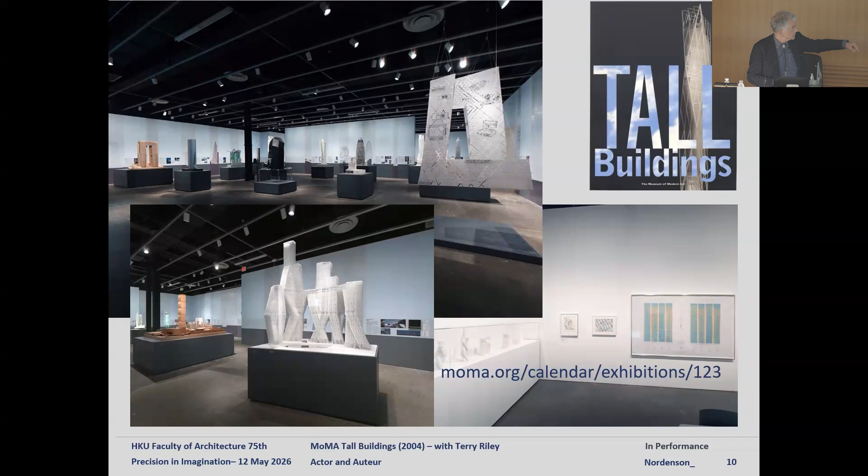These are some of the buildings that were shown in the exhibition. A big part of the exhibition that I felt was very important was to show the buildings in section. If you think about the CCTV tower, part of the magic of that idea and its inevitable evolution was the ambition of what it was going to do in section, not only as a beautiful sculptural object in space, but also as an inventive spatial idea about circulation and section. Obviously not all of that played out as the architect had wished, but it was an ambition worthy of being represented as we did here.

So I want to talk a little bit about the World Trade Center. This is a photograph taken shortly after the building was completed by the engineer Leslie Robertson.

Robertson worked with Yamasaki on this building and did something very inventive that nobody knew about until we made a drawing that I'm about to show you. You may be familiar with this structure. It was quite an abstract work of architecture, because each of the vertical members and each of the horizontal members that make up this cage—a kind of stiff tube that resists the wind loads—has the same outer dimension from top to bottom.

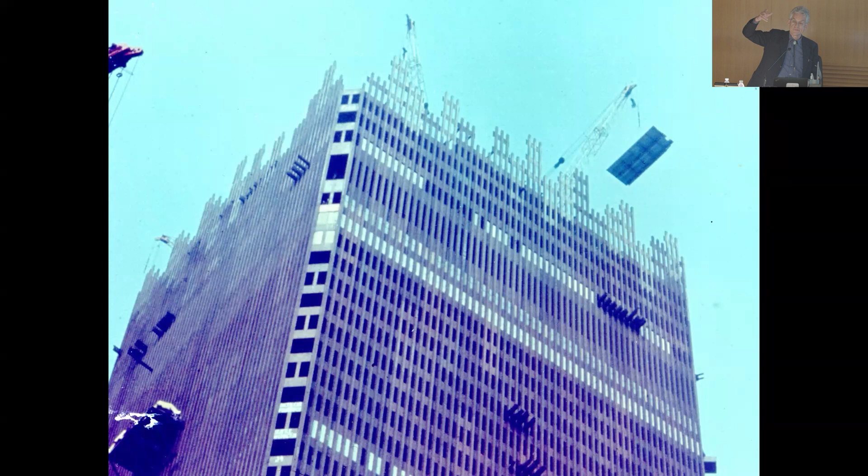So there's no recognition of the fact that this is a heavy building coming down to the ground, resisting wind that is quite strong, and would normally be thought of as something that would get thicker at the base. Instead, it's all the same throughout, top to bottom. So there's this very specific decision to create this kind of abstraction of a building that also has a specific role in resisting the wind loads.

Given that, and I don't know whether the idea that all the members would be the same came from Yamasaki or Les Robertson, but given that was a premise they may have invented together, what Robertson did was manipulate the kind of steel that each part of the building would be made from. He picked 14 different types of steel, ranging in strength from very strong to normal, and located them, as you see here, color-coded—red for high-strength steel, blue for lower strength steel—distributed in a way, these are unfolded elevations, that achieved the goals he had for the behavior of the structure.

What he was trying to do was overcome an effect you get in these kinds of box sections, where the forces try to stay near the corners. The purpose of a box section like this is to make a complete section where the front and back contribute to the stiffness of the building as flanges. But the problem is that the forces going into the flange from the sides don't always get into the middle of each of the faces of the front and back.

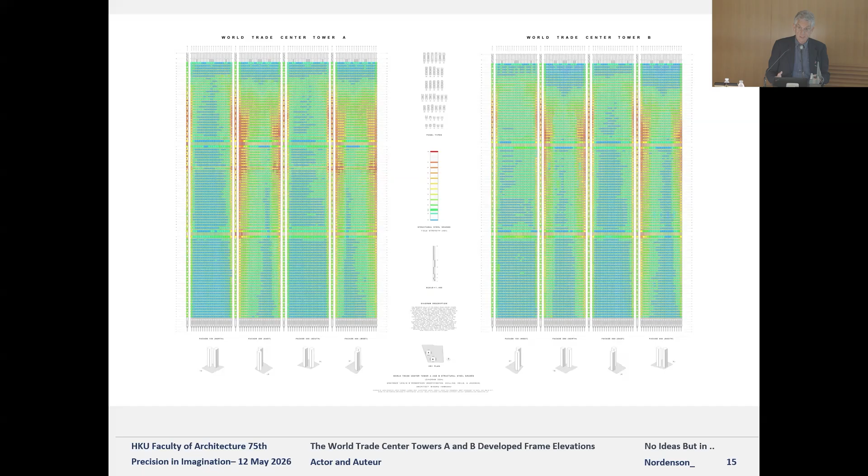Now, he was responding to what? He was responding to the variation in wind load coming off the water side or coming off the city side. He was responding to the fact that you had two towers that shielded each other from the wind. So what you're getting here is his choice, but also a representation of the results in the wind tunnel of the effect of this particular environment, with a particular distribution of wind forces at different times of the year and the relationship of the towers to the city.

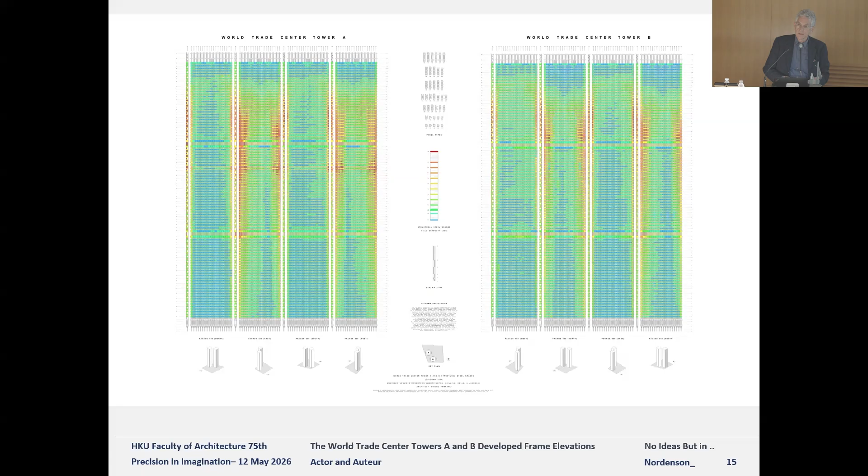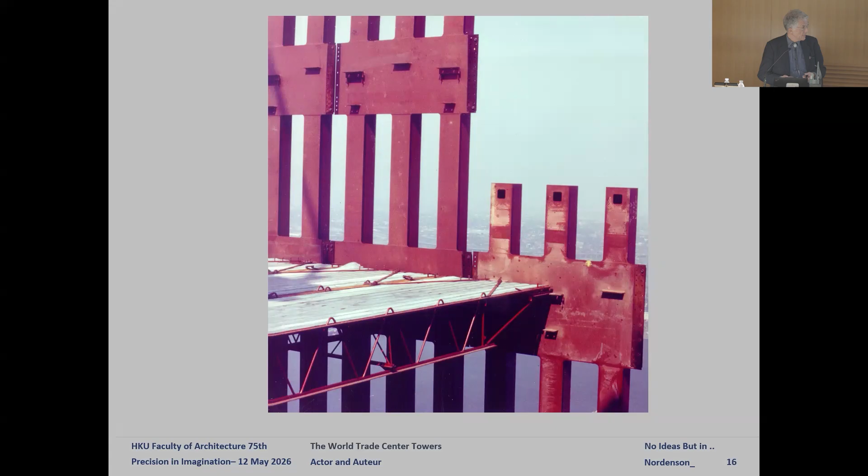So we drew this all out in this drawing, which was exhibited in that MoMA show, as a manifestation of this amazing creative act that had never really been understood or seen before. Here was somebody making something extraordinarily special that no one could see. Here you can see how these members are all the same—it was all prefabricated, everything really made from scratch. They were trying to channel the idea of the Apollo program into architecture, trying to make something with the same kind of ambition and technical prowess, the lightest possible building they could make.

So that's one model where there's a creative act that actually erases itself. Another kind of model is the Statue of Liberty, where you have three very separate authors operating in parallel. You have Eiffel, who did the structure inside that you see there all the way on the right, and you have Bartholdi, who designed the sculpture you see on the left. This is when it was being mocked up in Paris before it was disassembled and shipped over—everything was prefabricated in Paris in these shops. The skin is thin copper that was pushed into its shape on wooden molds installed in the shop—very complex, beautiful folds in that skin.

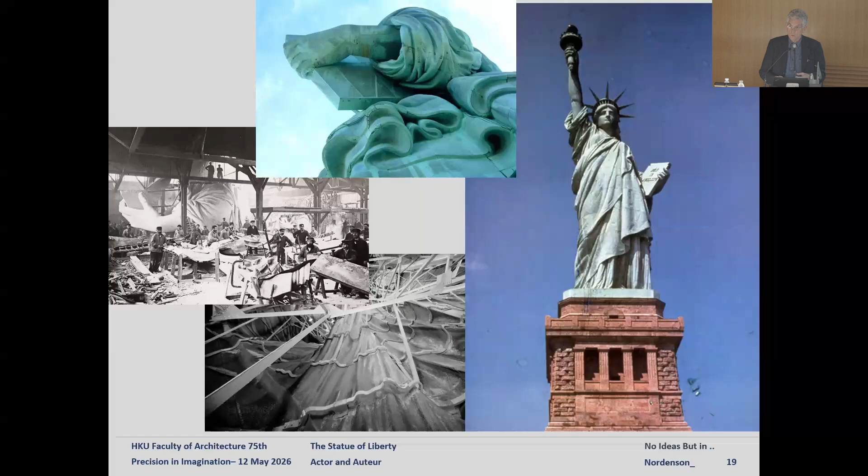The structure inside, sorry, the structure inside you see there on the right is a kind of pillar, like a core of a building with arms sticking out that then hold the sheets of that skin like leaves on a tree. So the sheets are independent from one another, floating relative to each other, held by these branches of this kind of tree-like structure. Here again, a very different effect on the outside than what you learn as you get to know what's happening on the inside as well.

One way for me to think about structure in its role in society, maybe responding to Shigeru Ban and Ito, is to ask what do they mean when they say structure? They don't necessarily mean something instrumental. It's not just the structure that is there to hold up whatever form they come up with.

It's something different. And I think one way to understand how it's something different is to think about what happens when you're faced with a ruin. So after 9/11, I helped organize a group of structural engineers that went out about 3 days after. 9/11 was on a Tuesday. We were on site working on Friday, helping the contractors move things around safely, basically keeping an eye on what they were doing. Everybody was very traumatized. Everybody was working really hard. It was a situation where people could easily make mistakes and get hurt.

So we organized into groups, and then I also organized teams to go out into the neighborhood and map the damage on all the buildings, about 400 buildings in the neighborhood that had been evacuated, so that people could come back and live in the buildings that were safe. We used some techniques that had been developed for post-earthquake damage evaluation for that.

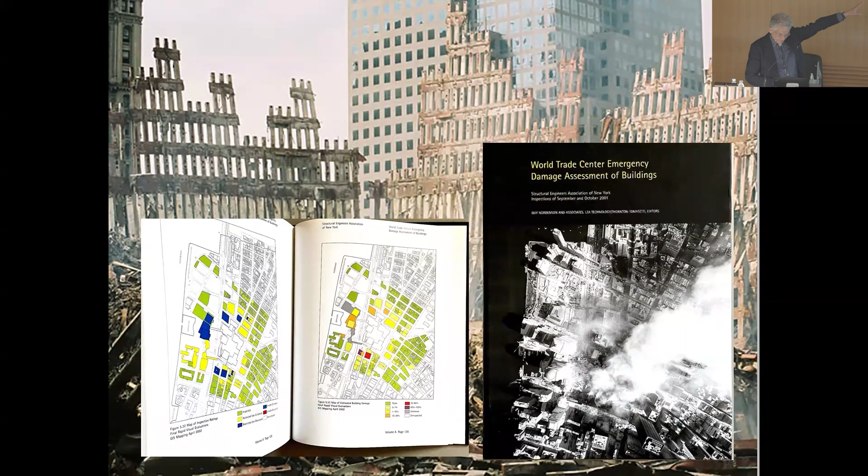But one of the things that was immediately discussed is, what do you do with all this? Unfortunately, the American impulse in a situation like this is to wipe everything off and hide it somewhere. What could have been the case is that we might have kept what remained, and used that as the monument. That's the structure. And the structure was something that played a significant role.

People are focused on the fact that the buildings collapsed, but it's true that the buildings also stood up for quite a long time, for almost an hour before they collapsed, which meant that people who were below the fire could get out, but the people above the fire could not get out and died. That's actually one of the reasons why Rem came up with the idea of the loop, was a reaction to the lesson that he and everybody else learned about 9/11. This could have been the thing that we were looking at in the future as the monument.

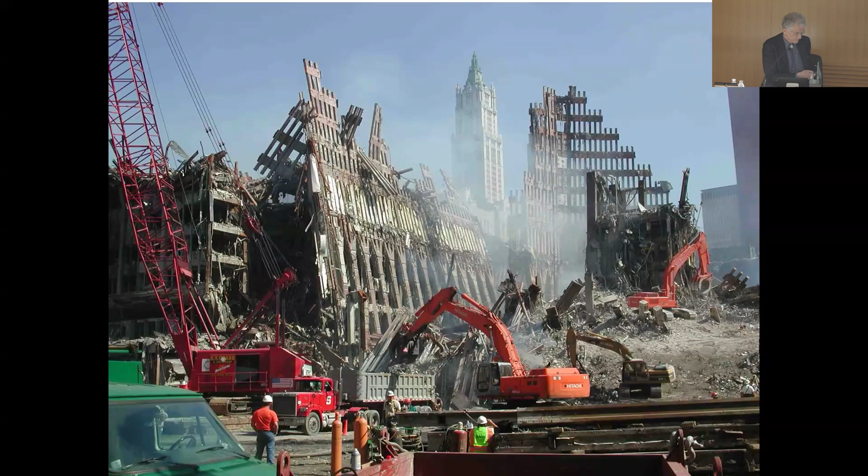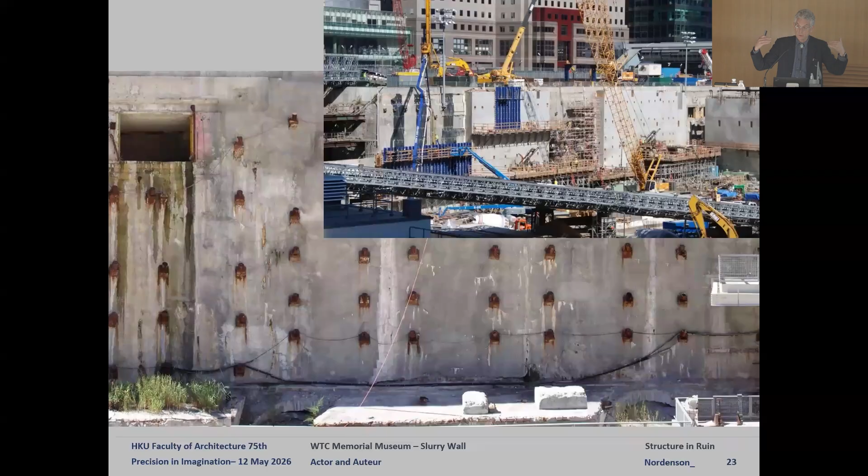And the reason I show this slide is I worked on this, the portion of the old slurry wall that became a kind of symbol for people. I think Danny Libeskind was in particular quite attached to this slurry wall. So I was given the job of figuring out a way to hold the slurry wall without putting any structure in front of it so you could actually see the thing. This image is showing you that portion, as you see there in the middle, of the old slurry wall that's being held from behind, and is now part of the museum there.

So that's a ruin. That was part of the structure that had some sort of meaning for people as a symbol of resilience, as a structure, which before that time didn't really have anything more than an instrumental role in the building. So things get transformed in that way. Think of the Parthenon, right? It's a ruin, but we're attached to it as it is. We don't want to go back in there and paint it back with the colors that it had before. We don't want to go back and add a roof and do everything else.

There is some restoration going on, but we see this as a ruin, and it is a structure. It's a peculiar structure because it's made to work like a wooden structure, but it's an extraordinary influence, at least on Western architecture. There are other examples here in Berlin, the church that was bombed during World War II and was kept, and they built a new church around it. So how we react to tragedy, what's our relationship to ruins that are the manifestation of those tragedies, is a relationship to structure, if you like.

So I think to some extent that may inform what Shigeru Ban and Toyo Ito are saying. There's something for them about the structure that has a deep cultural significance, and I think it's represented by these situations.

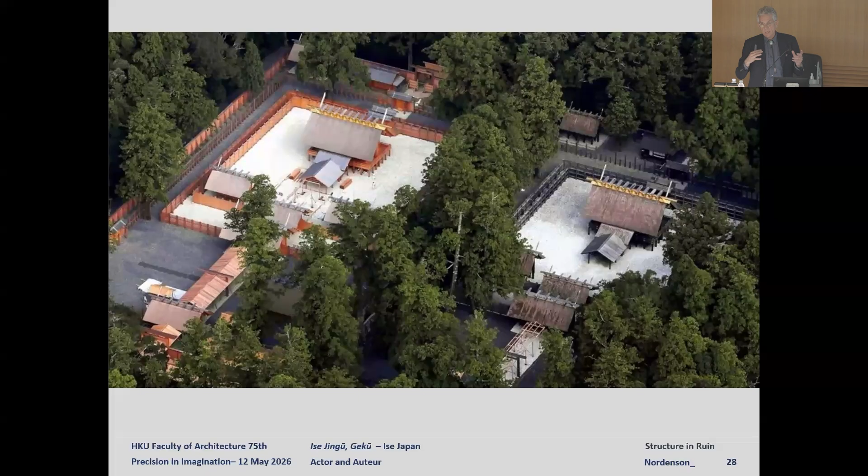There are carpenters, metal workers, all the people that do the thatch -- I'll come back to thatch in a little bit -- trained through multiple generations of rebuilding, so you start out at 10, 12, or 15 years old, and you may end up as the master at age 95. That's a different kind of relationship to structure, to monumentality, to craft, all of which I think play into the reaction you were describing from these folks.

Here you see the old and the new. There are lots of reasons why it's rebuilt, relating to the deity, and lots of not-so-nice reasons why it was such a significant part of Japanese culture, because it represents the fact that the emperor was a deity. It's a complex thing, like any other work of architecture, but it's worth understanding and studying.

So that's -- oh, I keep doing this. Sorry about that, I'll lean on this.

So that's one way to think about structure and the way it plays a role in our culture. And that comes back to this question of what are these forms of collaboration represented in these kinds of situations that we can study and learn from.

With film, you may be aware that in the 1950s a group of French directors developed auteur theory based on people like Hitchcock or Howard Hawks, American filmmakers they saw as having a particular style repeated throughout their films. You go to Hitchcock movies, they're all different, but they're also all the same -- they have a consistency that gives them the impact they have on you.

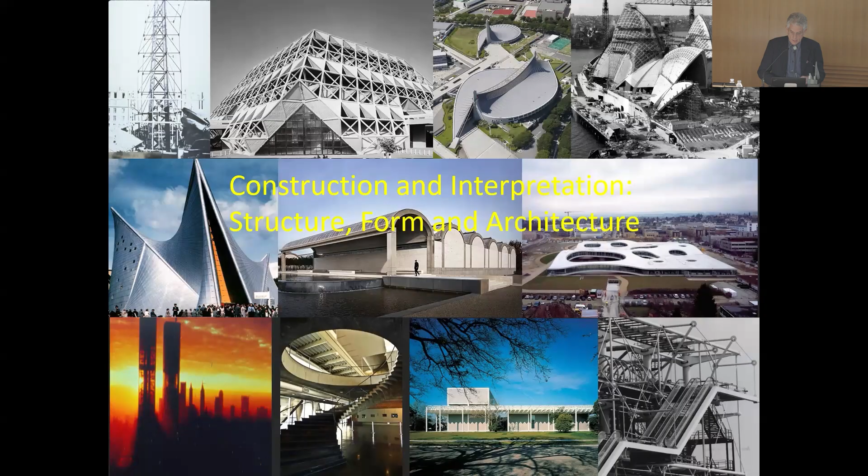So back to architecture. I teach this course, and my ambition is to turn it into a book called Construction and Interpretation, which tries to look at examples of notable works of architecture where there is a complex interaction between the actors participating in it.

Usually you can tell who the author is—the architect, like the film director who is in charge and making the key decisions. But sometimes it's more complicated than that, and sometimes that complication makes it a more interesting work of architecture.

This is the Philips Pavilion of Le Corbusier, which he worked on with Iannis Xenakis, who was an architect who eventually turned into a composer. Corb's idea was that this pavilion was like a stomach—you would go in one end, digest the experience, and come out the other end. So that was his diagram of l'estomac.

What Xenakis was charged with doing was turning that into a three-dimensional form based on these sketches done by Corb. Corb was very busy with Chandigarh, so he wasn't there a lot, and Xenakis ended up in charge of this process.

Building this thing was complicated because it wasn't really a shell. So they had to come up with a system of prefabricated panels that they erected—concrete panels cast on sand, something that Sanaa, that Nishizawa did recently with Sasaki as well. Cast on sand to make the panels that make up this thing.

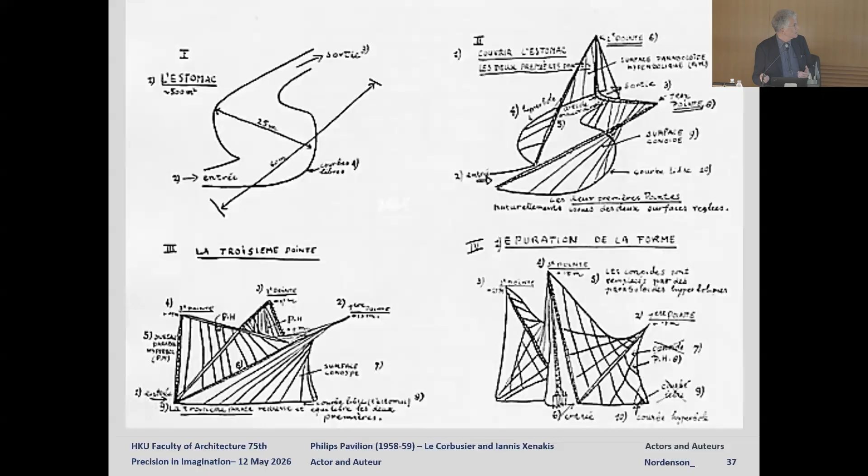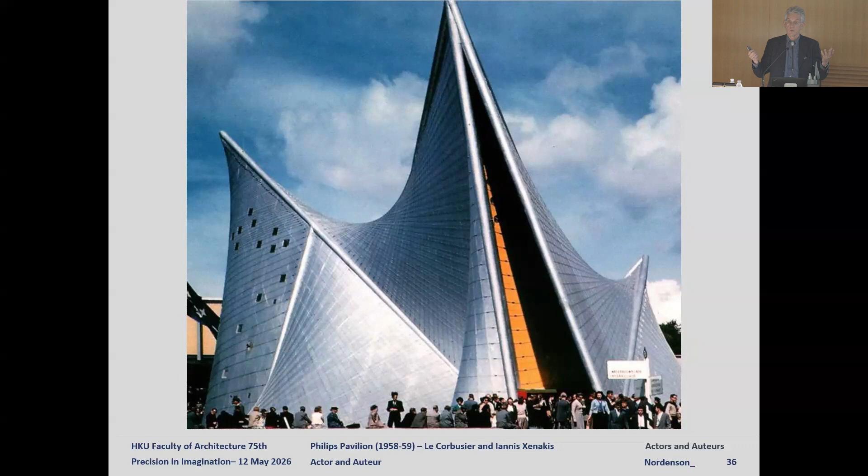If you want to study it, there's a wonderful book by Marc Treib that goes into detail. You can also find videos online of what was happening inside—it was a full experience, movies, music, etc. It was a complete happening inside.

Another example is the collaboration between Pier Luigi Nervi and Marcel Breuer on UNESCO. The team of architects was established by a larger group who were put in charge by the UN of deciding how to make this campus plan and the buildings inside it. Here you see some of them: Corb, Gropius, Markelius, Ernesto Rogers, Saarinen, Niemeyer—some of the same people involved in the UN in New York, both there and at UNESCO.

I think their major goal was to keep the job from going to Corb. Corb, of course, wanted to do it all, and their role, particularly Gropius's role, was to try to maintain this as more of a group project.

What you see when you cut a section through the building is this very characteristic structure by Nervi. A little bit like with the Statue of Liberty, you have a structure of great elegance and sophistication inserted inside the building, the plan of which was decided and developed by the group that you see in this picture.

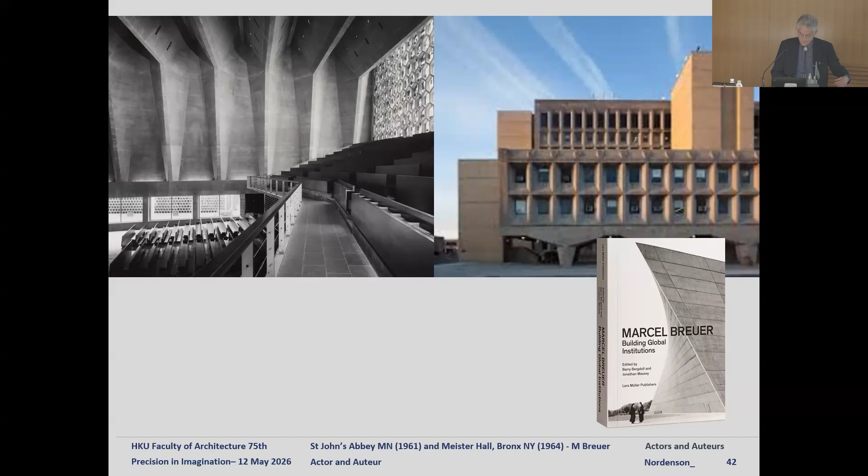There's a wonderful book that Barry Bergdoll put together of essays about Breuer's career. And I have an essay in there trying to argue and explain about the structure.

There are other buildings that have the same sort of characteristics, but also actually have an even more significant role as symbols of a nation. This was the Hall of Nations, built shortly after India got its independence. Indira Gandhi commissioned it, and it was done by Raj Rewal and the great Indian engineer Mahendra Raj, who had worked on Chandigarh with Corb. It was since destroyed.

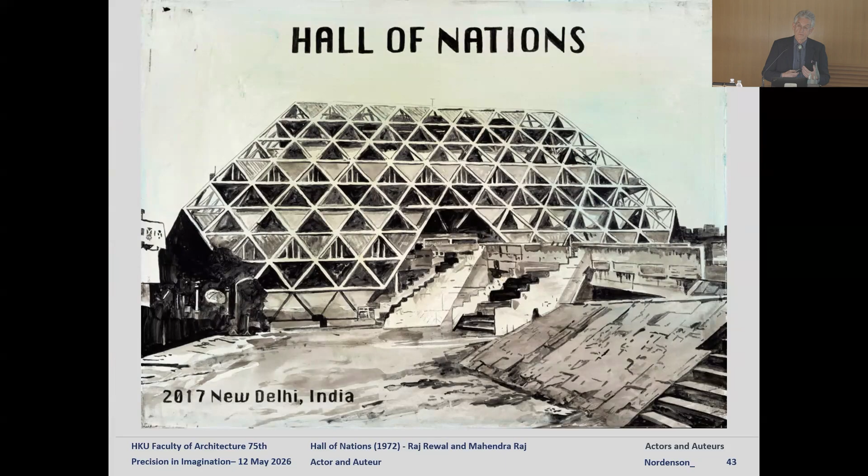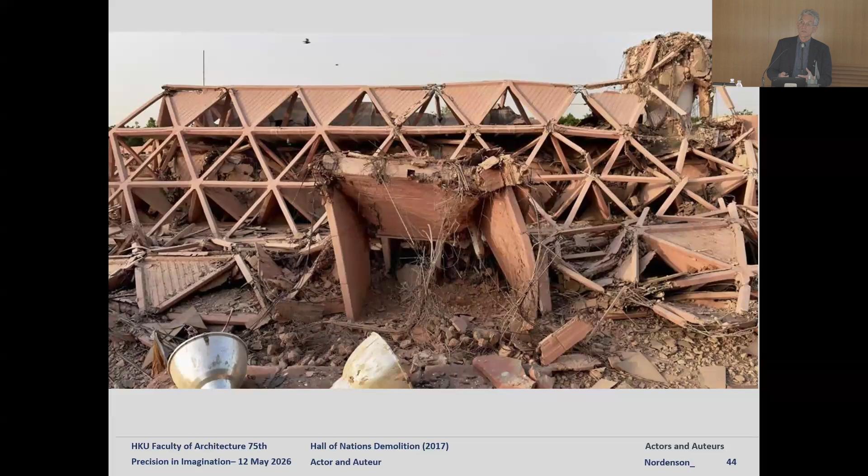Sometimes a structure—and this is a very unusual one because it's a big space frame made out of concrete, which is not the normal thing—that in itself was an effort at producing a sense of modernity, a sense of the rise of a new nation. Which is, of course, why in the current regime it was unceremoniously destroyed because of what it represented. So sometimes these structures have an important and significant role as national symbols.

These here, the Olympic roof in Munich for the 1972 Olympics—again, a complex situation between a lot of different actors. Frei Otto, of course, but the architects actually stole his ideas and won the competition, and then the government said, no, you have to work with Otto because it's his ideas that you're using. Great engineers were involved, Jörg Schlaich, Heinz Isler. A combination again of different actors coming together and producing, I think in the end, a remarkable structure that at the time was meant, and I think did represent, the notion of a light democratic spirit that Germany was trying to present to the world, even in 1972, not long after World War II.

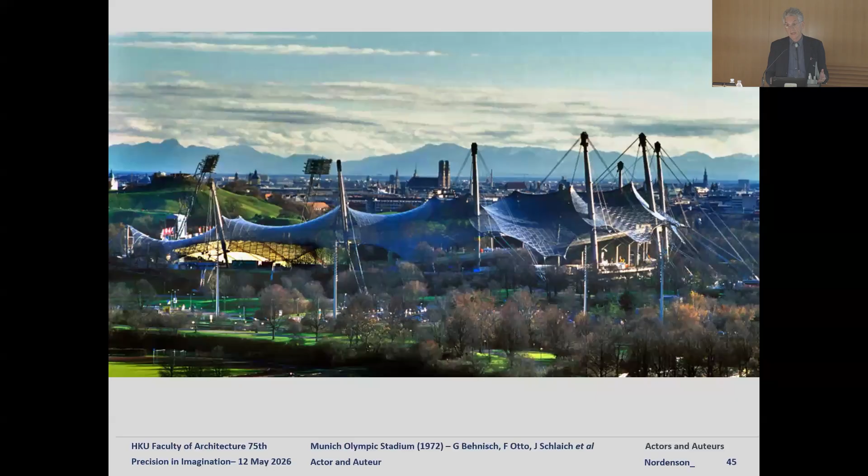So structure plays a role.

Here again with the Sydney Opera House, a very complicated relationship between Ove Arup and Jorn Utzon. I've spent a lot of time in the archive thinking and reading about their relationship. There's lots of confusion about where different ideas came from. But in the end, Utzon quit, but essentially was fired, and then the team had to execute his project after he left. If you study the project and you visit, I think it's a marvel of how well they had internalized the spirit and the concept—the glass walls, the interiors—all of these featured a very true representation of an idea after the author had left the building.

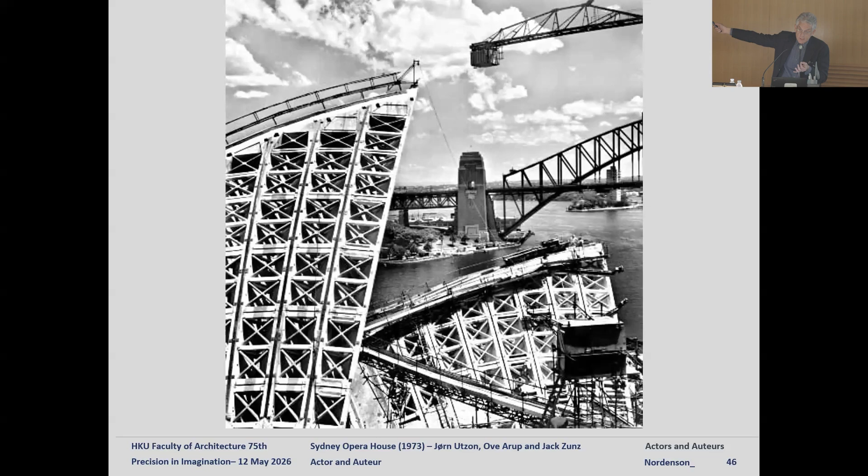So these are great examples, I think, of how great works come about through these kinds of interactions, which in some ways are similar to what you read about and hear about in film, Orson Welles and other examples.

This is the Mannheim Garden Festival Hall outside of Mannheim in Germany, another Frei Otto project, but with a completely different team, Ted Happold and others, Ove Arup, etc. Beautiful, very rational structure as well. And I'll show you a picture in a minute of how it was built.

I think it's really useful and important to study these kinds of projects because they obviously, whether you like them from an architectural point of view or not, they have a cultural impact. And they have an impact because of their culture, because of the way they come about.

And so their histories are really useful as a lesson for all of us in how we can work together to get certain things done.

So I have 7 sections, we're on number 5. This is a really good one. John Cage was a great musician and composer, whereas Cunningham was a choreographer and a dancer. They were also partners in life and worked together a lot. But again, like with the Statue of Liberty, like with Nervi and Breuer, they did their own thing and somehow it came together. In Cunningham's case, channeling the spirit of Marcel Duchamp, he saw that separate track colliding as the thing that made for the magic of the performances they did together.

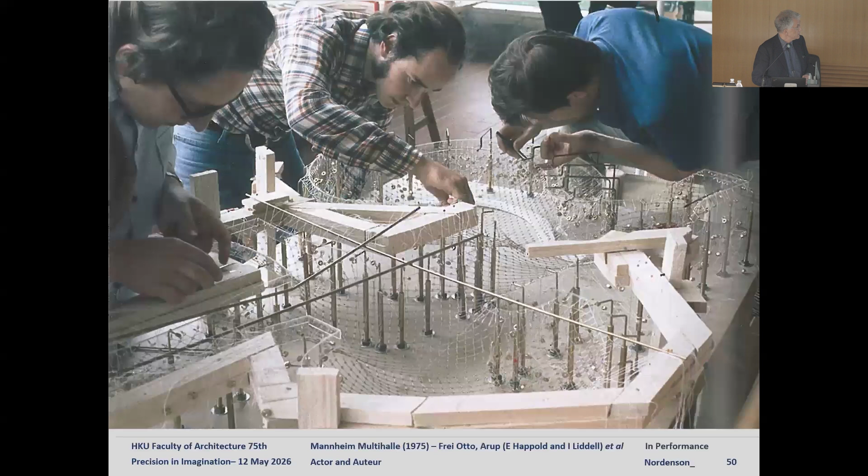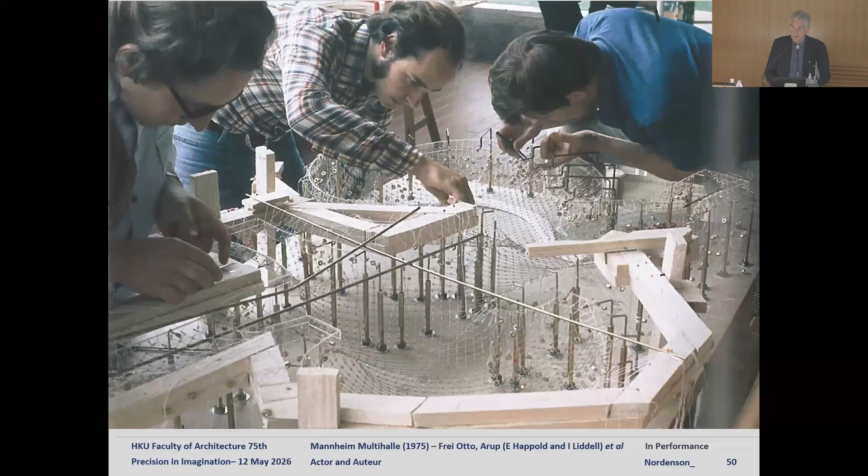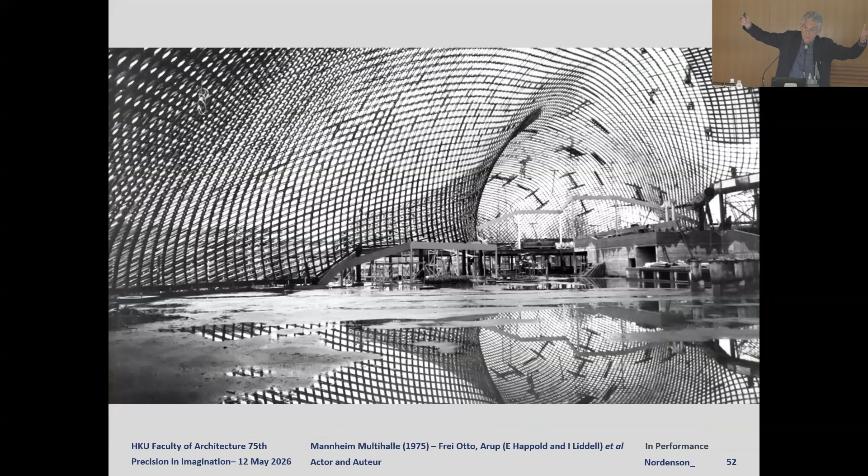The production of buildings like this in Mannheim, the models that people make in the process, is a kind of performance. We look back on the photographs and we're delighted by the energy we see in these efforts. The construction, this is Mannheim again, made out of thin strips of wood, the way the whole thing was laid out flat and then lifted up like a tent and stood there, even though it's so thin, because of the shell action going on, so creatively produced by the team that brought it all together. This is really worth a visit if you're ever in Germany.

And then the magic that's hidden. So, the pyramid in the Louvre - it was not easy for Pei to convince the French, the Parisians, that he could stick this in the middle of the courtyard of the Louvre.

So the magic that has to take place in order for things to happen, the performance that results from that, I think is a source of joy. It's something we can plan as well and turn into a part of our projects.

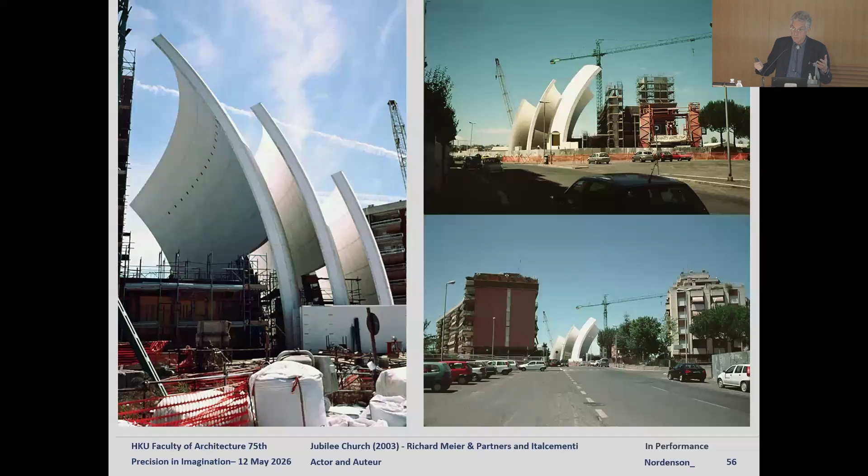This is a building I did in Rome with Richard Meier. I worked with him on the competition. He had this really beautiful idea of shells nested into each other. After we won the competition, the immediate reaction was, let's just build them out of steel and clad them with metal panels. I argued that instead, being in Rome, in the tradition of the Romans and the tradition of Nervi, we should build it out of large blocks of concrete that could be prefabricated and placed.

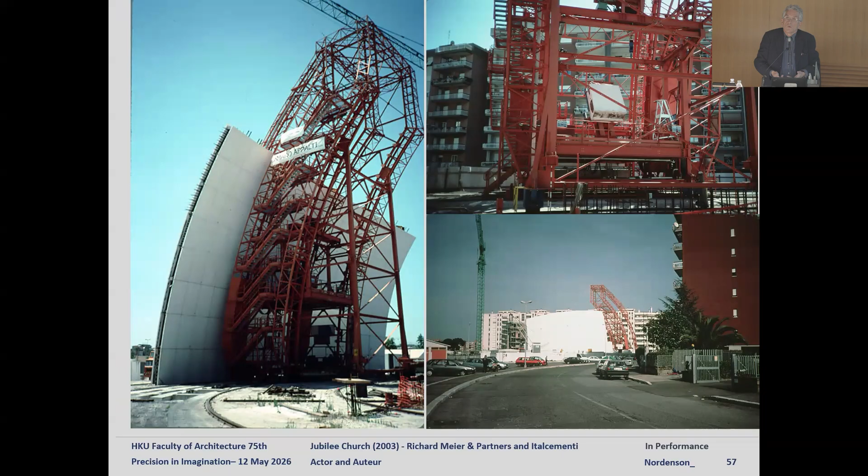There you see one there. The result was that the contractor came up with this giant gantry, La Macchina, that was swinging back and forth for 2 years, installing each one of these panels, building it block by block in a very systematic way, but also a way that produced this performance for all the kids growing up in the apartment buildings on either side.

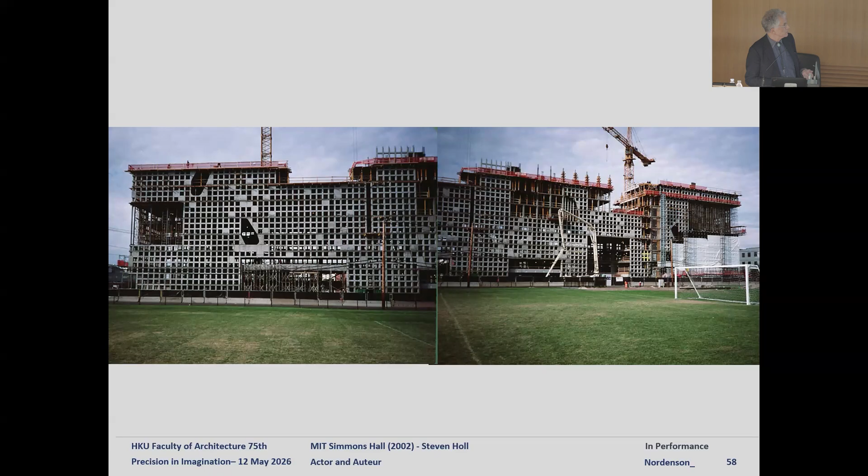The building that Anderson Lee and I worked on together with Steven Holl at MIT - Steven had this idea that this was like a sponge. So what we came up with as a result was a structure made out of panels of precast concrete, fabricated in Canada, that fit together like a Lego system, glued together with the concrete of the slabs, and had a pattern that had a lot to do with the way the forces were flowing.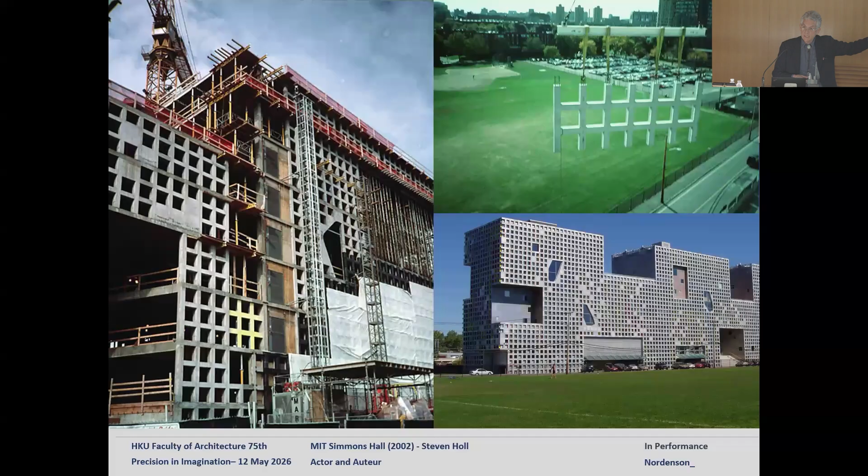So as in the World Trade Center, the conceit was that all the members were the same - the dimension of all the members is the same throughout, to create this kind of abstract effect. If you have to reinforce some portion in order to span or deal with a cantilever, we would fill in the squares in those key areas to make that happen. So you end up with this random pattern as well.

This is how they built it, pouring the concrete in between each stack of slabs.

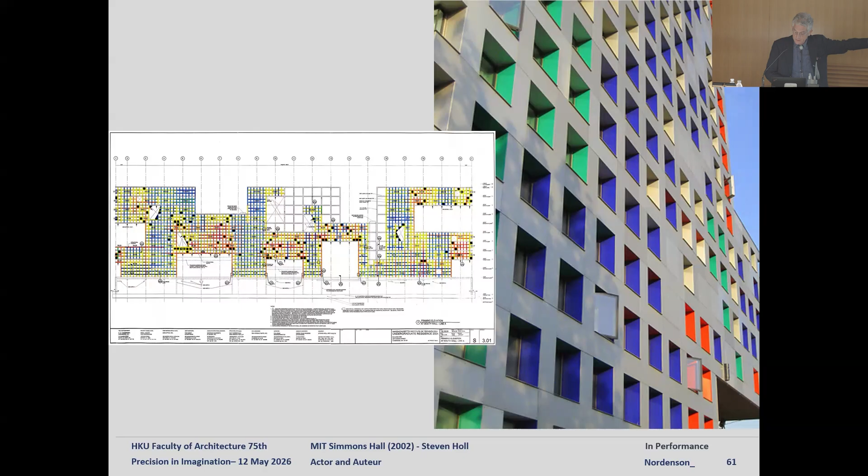In the end, Steven wanted to have a color pattern. So we took the drawing that the site engineer had used to make sure the steel was all in the right place, since there were different sizes of steel in the different horizontals and verticals. We took her drawing and used that to paint the color. If you remember what I showed you about the World Trade Center, this was kind of an homage to Les Robertson as well. Very different effect here with the Nelson Atkins Museum.

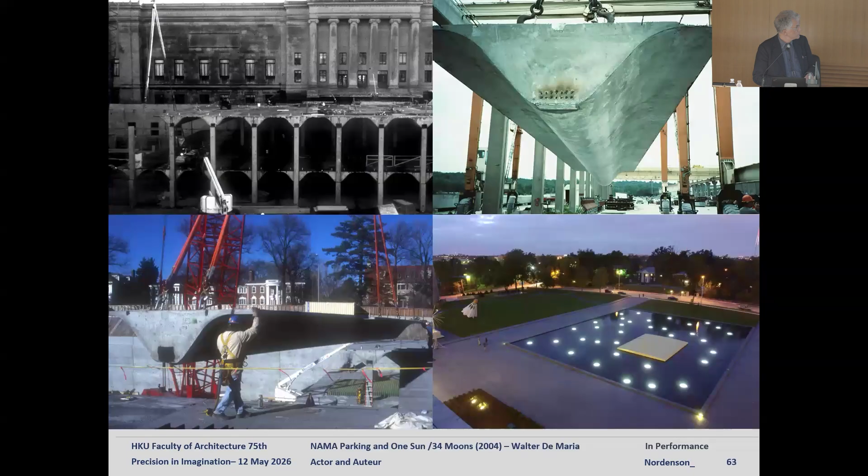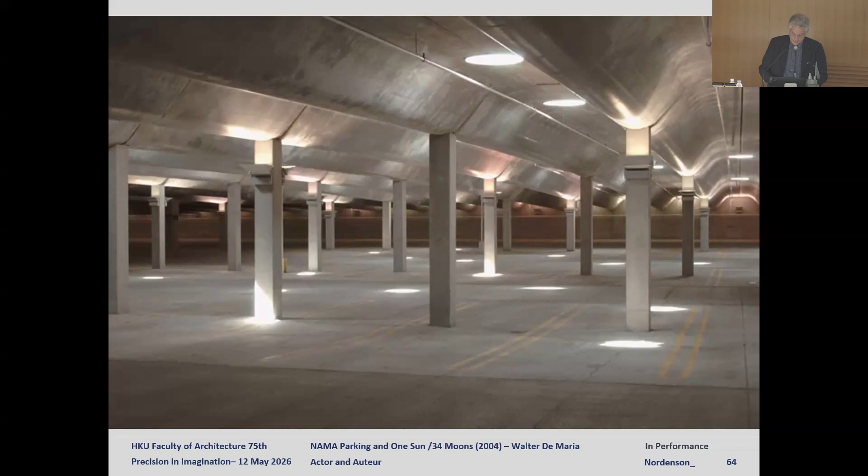This was the parking structure in front, and we made these custom wave tees that produce the effect of this sort of continuous corrugated look. And then another version here. I think in this case it's the degree of difficulty that goes into producing something unique, that's not off the shelf, trying to achieve a certain spatial effect, and it's worth the effort in doing so.

Similarly, in Houston, this building we did more recently is made out of prefabricated blocks of concrete that are stacked up and form the structure of the building. This is an art school, and it has a certain toughness as a result.

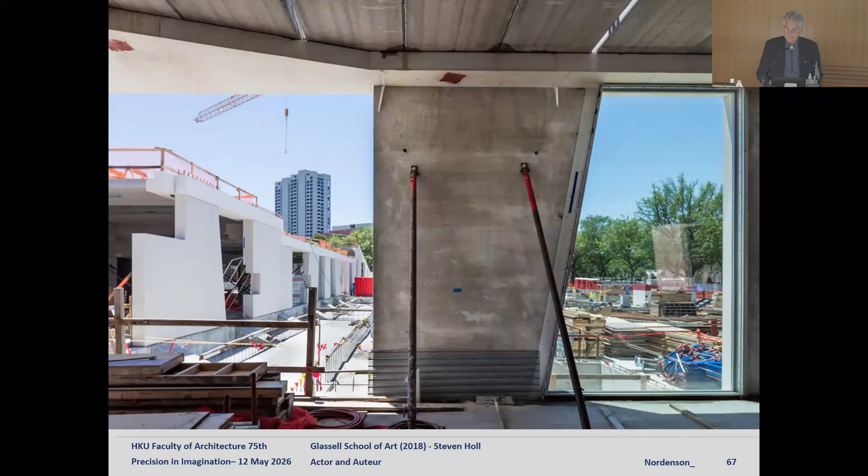So, attention to detail. This is a building, an addition to the Kimbell of Louis Kahn in Fort Worth, which was of course a very difficult project to take on. Renzo Piano was finally the architect able to come up with an approach—reflecting the geometry, the parti of Kahn, the idea of the three spaces of 100-foot, 30-meter length with gaps in between. So a very humble relationship to the precursor across the way, a certain distance from that.

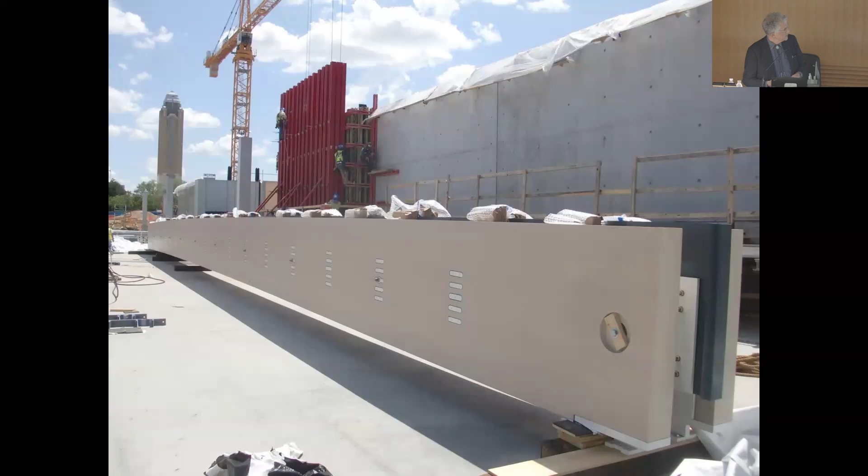The structure we developed in relation to that was based on using wood as the right counterpart to the concrete of Louis Kahn. We also have beautiful concrete, supervised by a great concrete fabricator from Venice. And then these glulam beams that we designed, supporting the roof. Here's one of them, and this is the result.

A key choice in this project was to let the structure be shown. If you're familiar with Renzo Piano's work, after the Menil building he did with Peter Rice in Houston, most of the museums he designed suppress the structure behind layers of scrims and louvers that filter the light—like the lens of a camera creating layers that produce the light effect in the galleries. We still have that here, though the structure does appear; we were able to let the structure be seen and play a role.

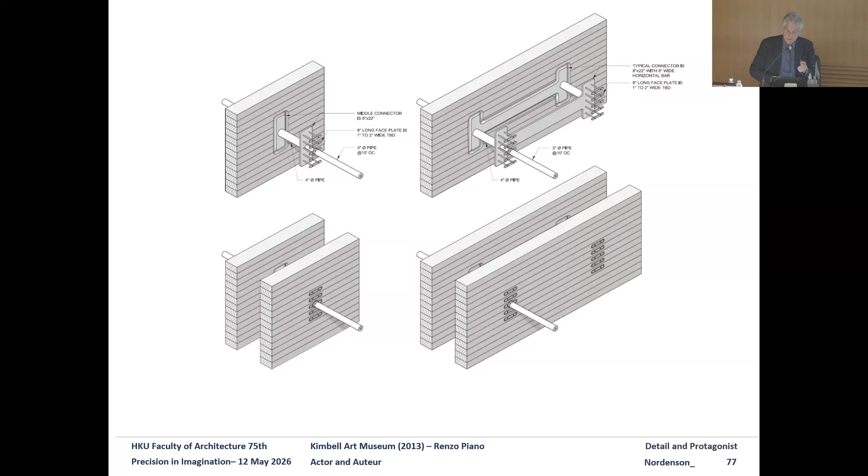The details were really important. Because we don't have any structure in the horizontal plane of the roof, since it's all glass, we needed to brace these thin beams against buckling sideways. So we came up with a system of H-like shapes, dog bones we call them, that hold the beams from twisting, using pairs of beams so they help each other out. All that detailing, all those little white lines you see, are part of that system, and they have a precision and highlight to them that is instrumental in the function of that roof.

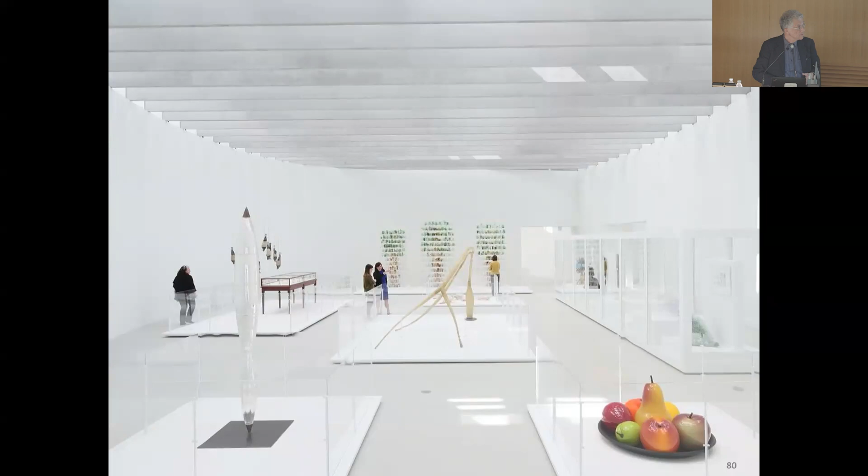Similarly, with Tom Phifer, the museum we did in Corning also has an open glass roof that lets the light in. In this case, the idea was—this is the floor—it's actually supported from above by the concrete walls that make up the galleries.

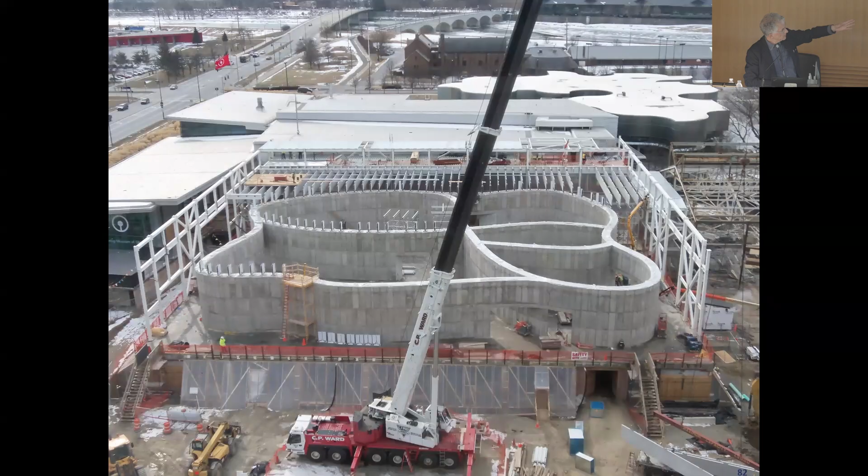Here you see them under construction. On top of that are these very thin precast concrete rafters, about 3.5 inches wide, spanning up to about 18 meters. So very thin, spanning great distances and creating the light effect, but also creating this ambiguity about the kind of structure that might or might not be supporting the roof.

I think the precaster, who were the same people who did the MIT building, were actually confused until the very end whether they were making structure or light louvers. And for the nerds in the room, it's complicated to do the analysis of the buckling of a thin beam.

The beam is up to 15 or 18 meters long and very thin, so it wants to buckle sideways. But because it's concrete and we didn't want to tension it, since that would make things worse from a buckling point of view, we had to come up with this approach of analyzing a cracked beam and understanding whether or not it was susceptible to lateral torsional buckling.

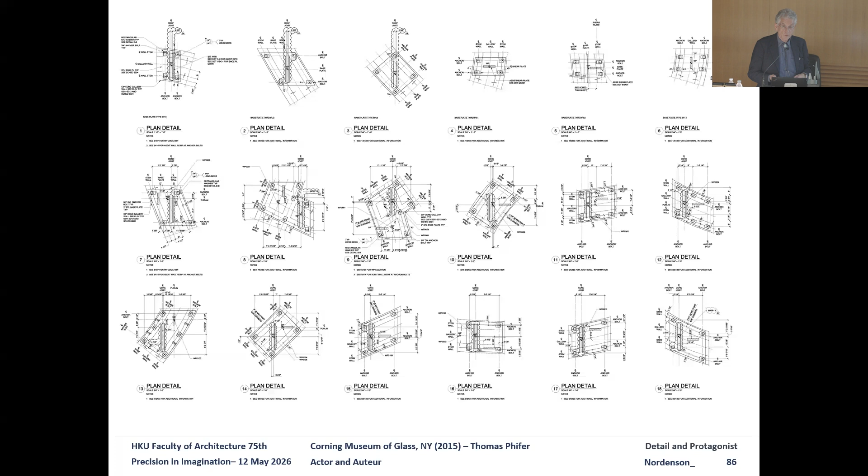The way they sit on the walls varies because of the relative geometry of these lines and the walls. So this is a kind of early proto-parametric approach to that. It creates a kind of abstraction in the space, but it's an abstraction that is produced by the structure.

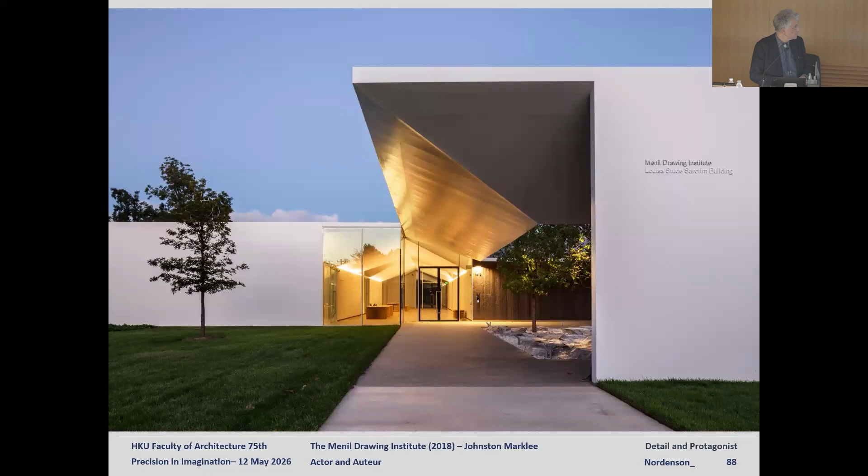I think we're coming close to the end here. This is a building we did in Houston with Johnston Marklee, who's from here. Many of you are probably familiar with him. Their design was very much a kind of folded paper, almost origami-like geometry.

So I proposed that the canopies outside the building, which produce these two courtyards, be made out of folded sheets of steel. What I think nobody quite understood as we were doing this was that you would sense the materiality of the steel.

I think part of the effect they were looking for is this sort of abstraction you get from these images, where you have these very flat matte surfaces of white and surfaces of glass, creating this abstract folded paper kind of object. You get that feeling very much when you go inside.

When you see the light shining directly on our steel walls, you also get that. But then when you start to get raking light, you start to see the materiality. So I think that double nature of the steel in the end contributed something, but it was definitely a choice.

The other thing that's quite beautiful there, if you get a chance to visit, are these walls made of hinoki wood, the same wood used for the Ise Shrine, called Port Orford cedar in the U.S. It was made by a fabricator in the Northwest U.S. who blasted the wood with glass beads to create a very beautiful rough texture.

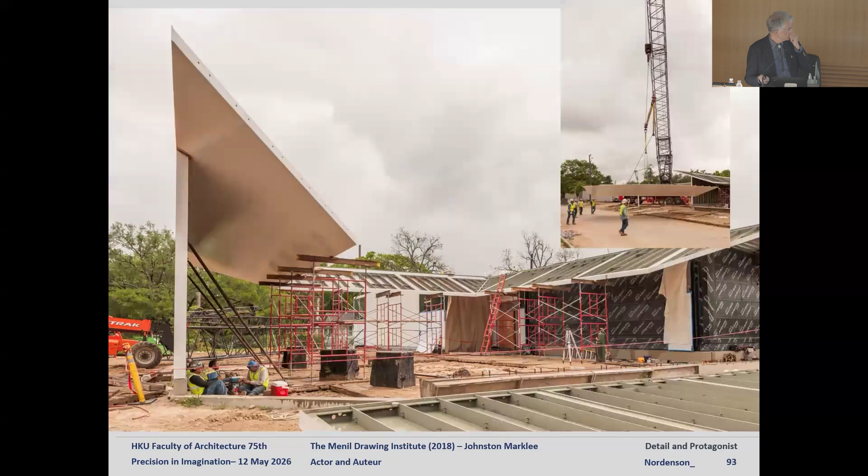That's it under construction. Okay, this is hot off the press. This was in the newspaper two days ago.

I teach a studio with Paul Lewis. We've been teaching together for a long time, and for a long time we were doing studios related to flooding and the design of communities and buildings in areas susceptible to hurricanes, mostly working in the US and parts of Europe.

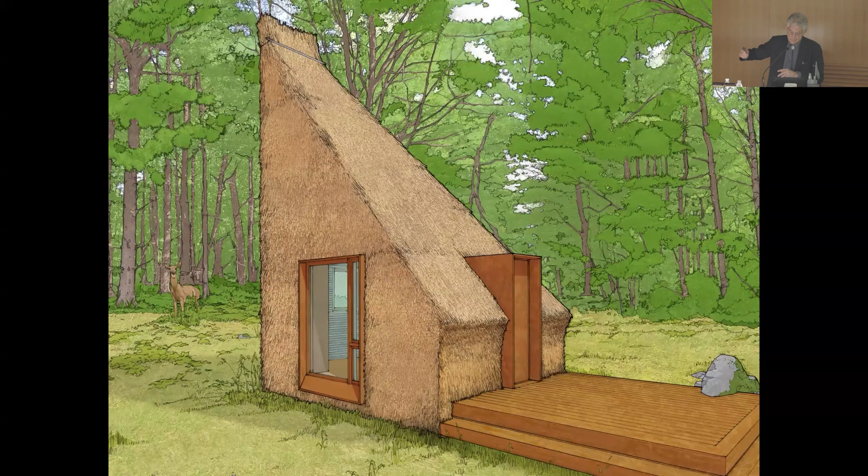But Paul has shifted his interest to working with biogenic materials. So this is a project we did recently, building a little pavilion out of straw and thatch. Maybe related, if you like, to the Ise Shrine idea, but it's an experiment in how we can use a material, straw, which is a byproduct of collecting wheat and other grains.

How can we use that as a material with certain structural properties? There's a whole tradition of using straw bales for building, but they're kind of soft and spongy and not easy to figure out how they function structurally. Here we're using a compressed straw manufactured product.

These are manufactured in Australia, compressed into these 2-inch thick panels. They use them for acoustical panels, like ceiling panels. They're light and they're making use of a waste byproduct, right? It's nothing you would have any other use for other than burning it and producing more carbon.

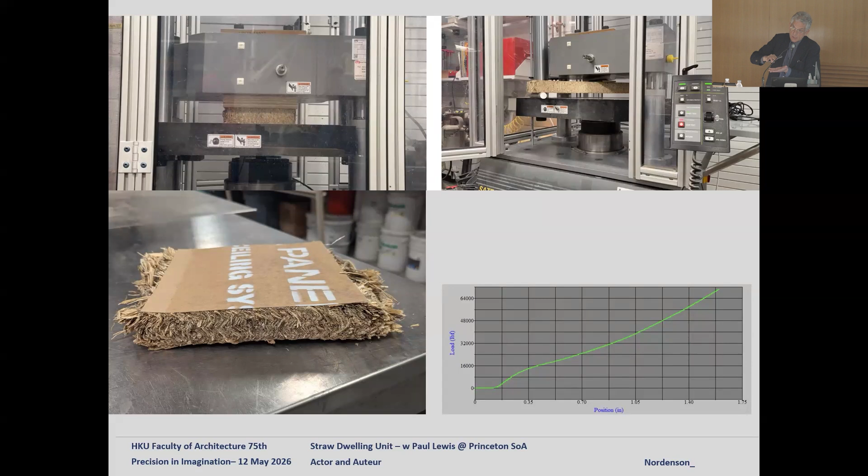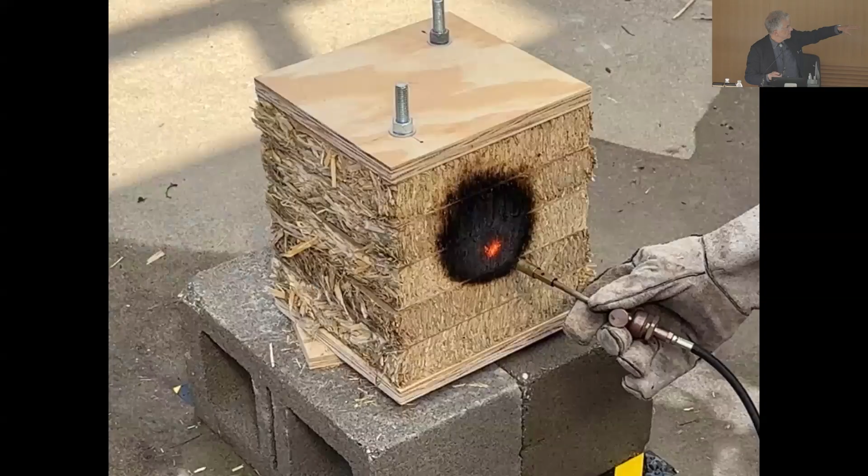So we're trying to find a way to use these panels structurally, and maybe to make other shapes out of this idea. They compress it, moisten and heat it, and that produces a binding agent from the lignin in the material, so they're not bad. We did some testing, including burn testing, to convince everybody we weren't building something that was going to go up in flames.

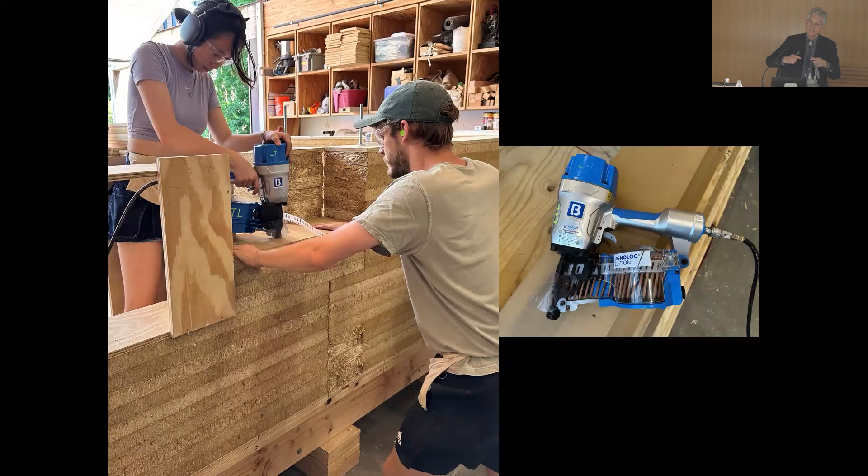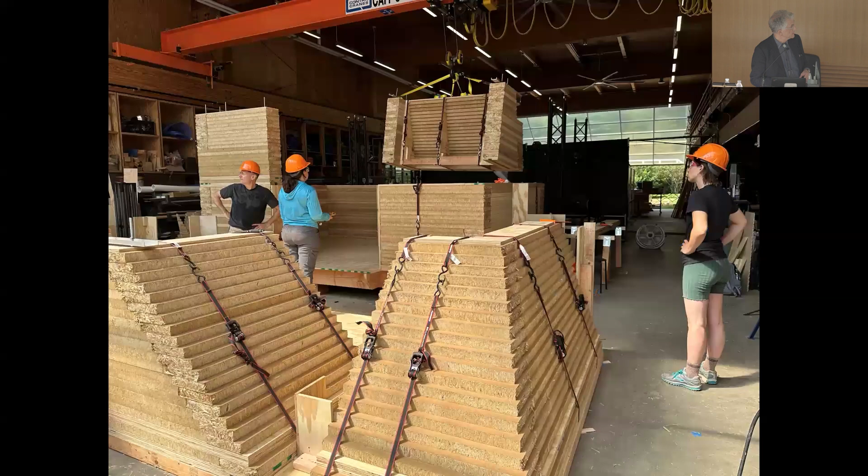We started building this using strips of material 9 inches wide, stacking them up and bolting them together to produce a certain amount of pre-stressing, so that the deformation would happen early on. Then we made corbels out of them—not just straight up-and-down walls, but walls that leaned in. We made them into chunks down at Princeton, since it was headed up to a property Paul has upstate.

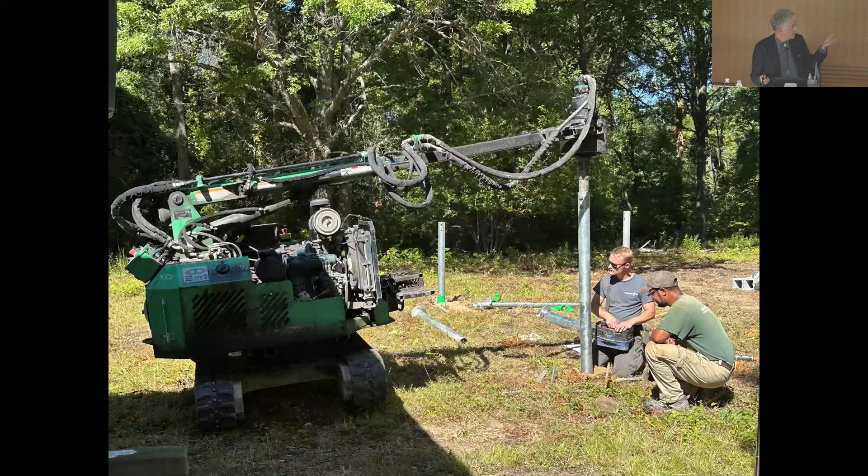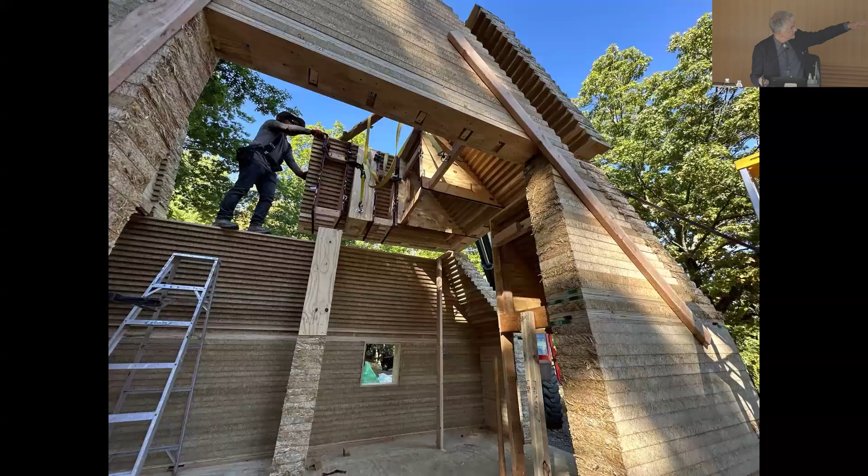So it was prefabricated in these pieces you see in this model, then installed up there. We have screw piles that get screwed into the ground—pretty lightweight but effective. Then a wood floor, and the chunks come in and are put together. Eventually you get waterproofing on it, insulation in some places, and then thatch, which is also prefabricated, brought to the site and installed.

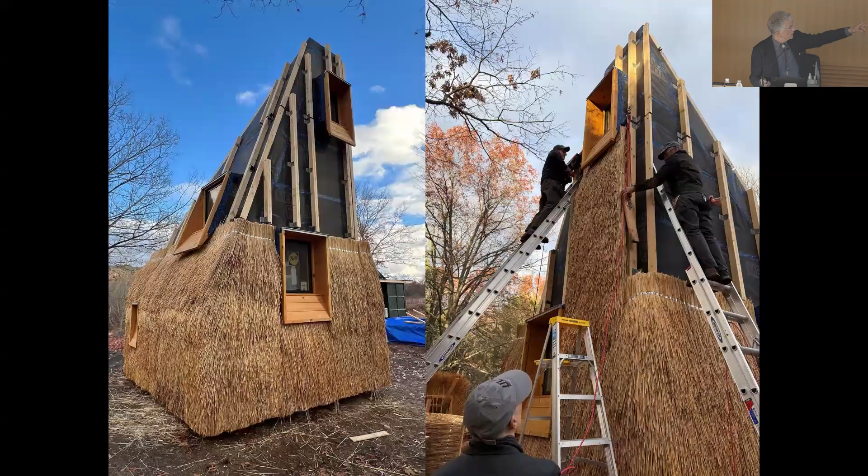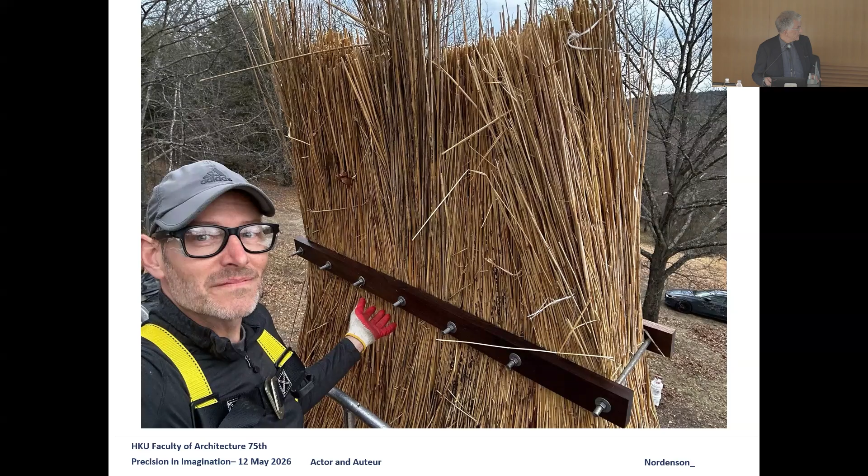And there's Paul. I'm lucky that Paul loves to build—I'm more of an abstract guy. He's really hands-on and really good at it. He oversaw the team that made the panels off-site and then brought them together. Now it's complete and quite cozy inside, and it was recently published. Okay, we're in the final stretch here.

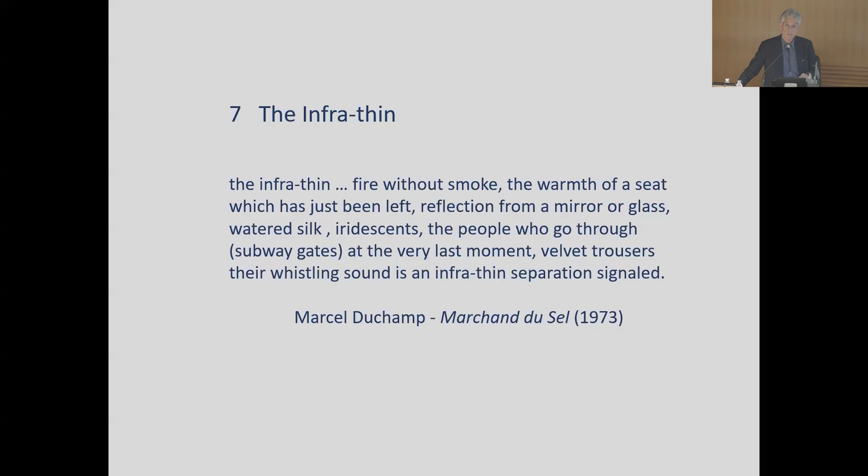The infrathin is this idea that Marcel Duchamp advocated, a sense of ephemerality—the sense that an idea, a work of art, a certain kind of event can have an impact while also evaporating in a sense. This is a quote he uses to try to express that. There's a great exhibition right now in New York on his work, if you have friends there or get a chance to go—it's really an extraordinary gathering of all his work in one place.

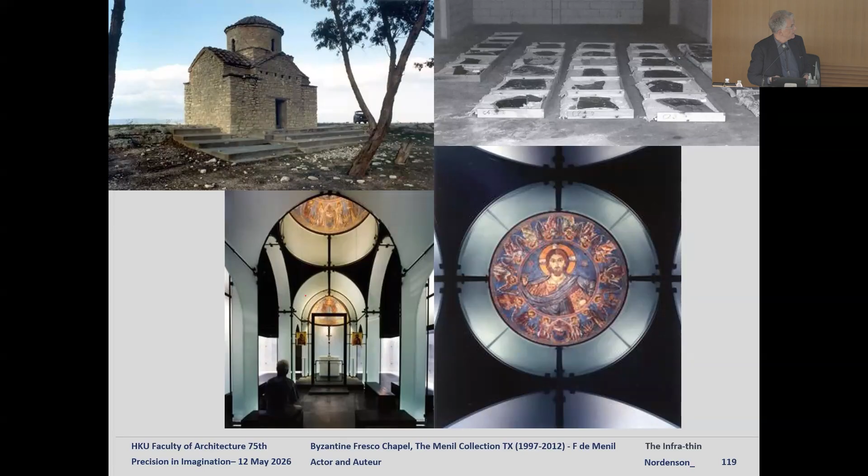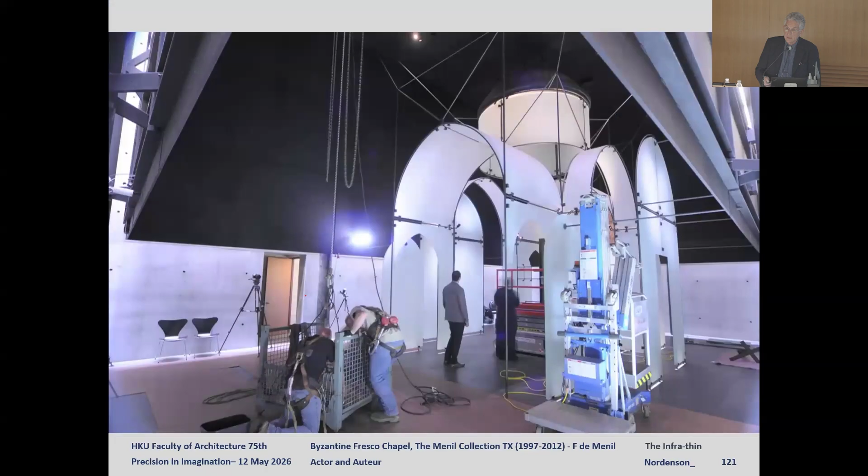The glass is suspended in a kind of spider web of steel rods that is pulled against the roof and the floor and sprung—there are springs at the ends of the rods that make sure that even if the roof moves, you maintain tension in the rods. This is during construction, you can see that spider web. The whole thing was taken apart 15 years later. So the event of a project, the thinness of a project, all part of this experience.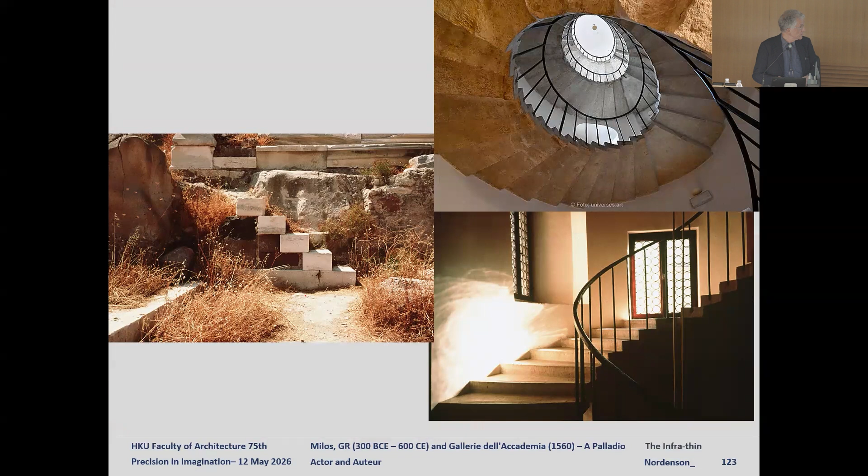In this case, and here are some examples, it's suspended off a glass wall, so it has a bit of a magical feeling. I've done a couple of these—there's one in Venice. It's great because people don't quite understand how it manages to hold up, but it's the same principle as Palladio's stair in Venice, or another stair I saw one time in Milos, Greece.

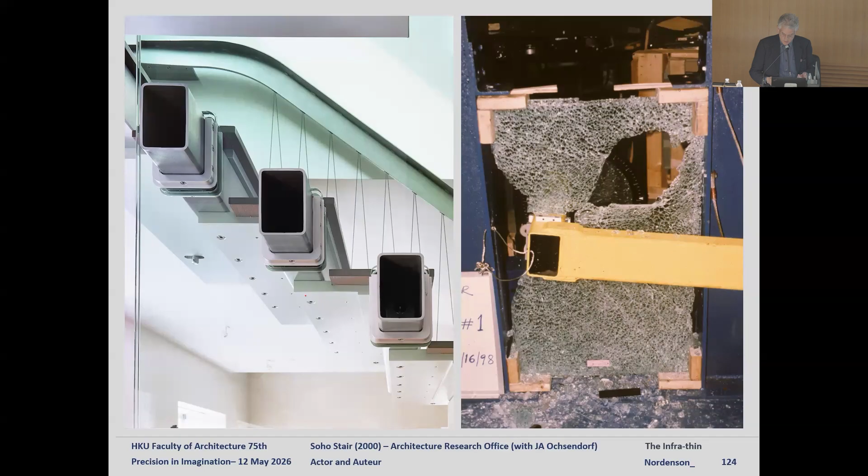So the steps are aluminum slabs—that's what you're actually walking on—and the risers are these tubes, which go through the glass. The purpose of the glass is to keep the tube from twisting over, because each step above is trying to pull the whole thing over, and the step below produces a reaction. So what you're resisting is the torsion going into the wall, which is why it works well—stone can do that. Stone doesn't like to just cantilever because it cracks, but if you interlock it, it works, and it held this guy up.

The wall at MoMA, which we worked on with Taniguchi—somebody was telling me they'd worked at KPF at some point. KPF was also associated with this project.

This is the wall that I worked on that has very, very thin members. They're 2 inches wide, and they span 20 meters. Again, it's an effort at making something look thinner than possible as a goal.

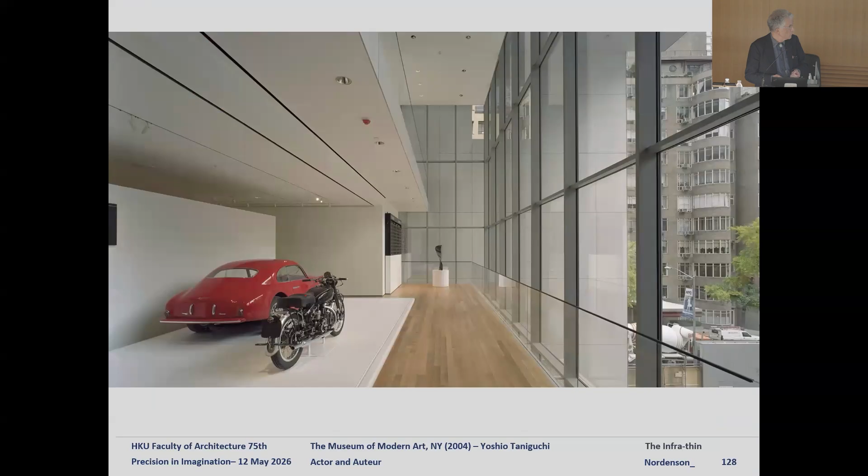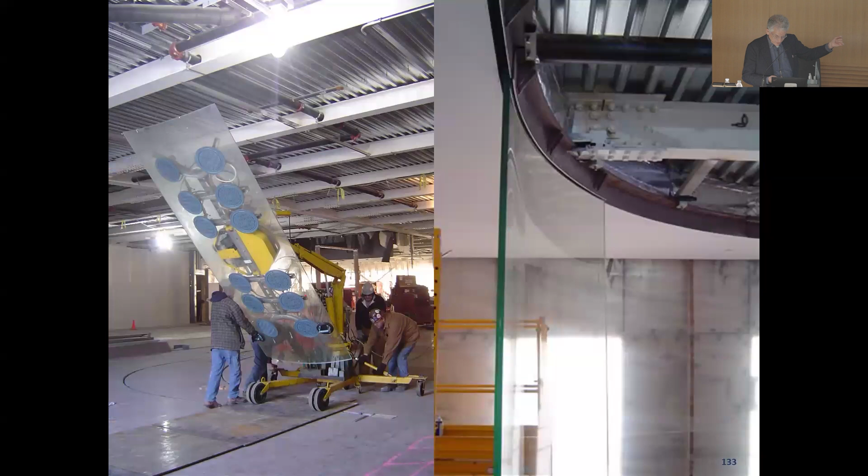Same thing happening here with this project, Toledo, the glass pavilion that Yung Ho was talking about, where the vertical structure is very delicate. The stability is actually provided by some steel walls and braces that you can sort of see there. I'm not quite sure I remember the part about the building swinging around, but it's a good idea.

There was incredible coordination in trying to get everything to fit together in a very, very thin layer of structure. And the end result really looks like the building is held up by the glass, partly because of the optical effect of all the reflections in the glass.

So this thinness, this disappearing act, I think can be a thrill with structure. It doesn't have to be brawny. It can be so delicate you don't even know it's there.

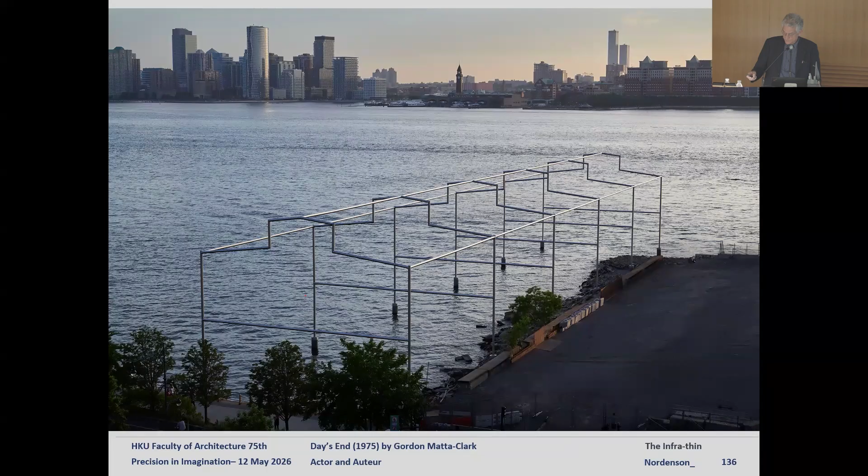Last project - this was a really interesting experience. There's an artist in the US named David Hammons who is very much the reincarnation of Marcel Duchamp. He has a sensibility that manifests in being quite elusive. He rarely shows up to events - he didn't even come to the opening of this. When we worked together on this project, we met maybe 5 or 6 times over the course. He's very conceptual in his approach, but also very playful and ironic in the way he produces his work. Really brilliant guy.

He was invited by the director of the Whitney Museum, which had just moved downtown into a building designed by Renzo Piano, which I did not work on, where they wanted him to do a show there. But that's not the sort of thing he does - he never really did museum shows. He's done a couple of gallery shows, beautiful ones. But he wants to be in control at the same time that he wants to let things happen. It's quite an interesting practice.

He didn't want to do anything in the museum. He didn't say much, but as they were walking around, Adam Weinberg, the director, pointed out that out in front of the museum was the site of this work by artist Gordon Matta-Clark, who had taken over this warehouse shed on a pier where ships would historically dock. It had been abandoned for a long time, then taken over by the gay community that lived in that neighborhood in Chelsea and the West Village, who used to go there and cruise.

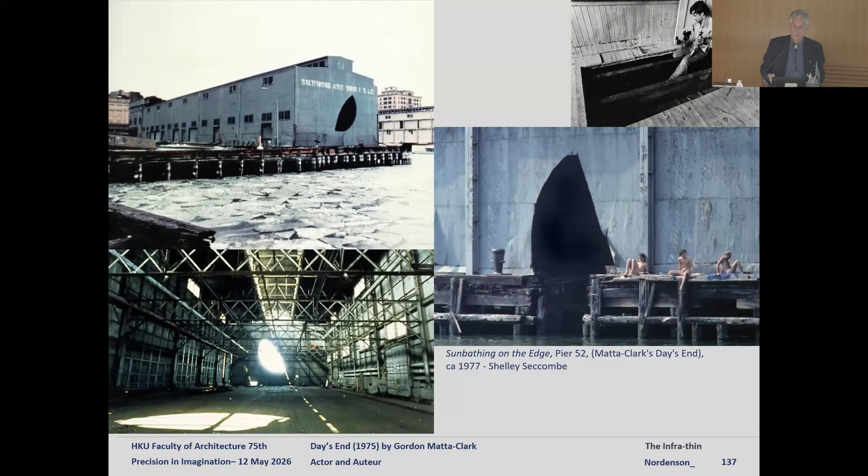There are all these great photographs from that period. He went in there and cut these big holes in the floor and the outside wall, turning the whole thing into a kind of cathedral of light. It was a miraculous project in 1975. It lasted only 4 years and then was demolished, but it stayed in everybody's head - one of those things that either through pictures or direct experience, people could never forget.

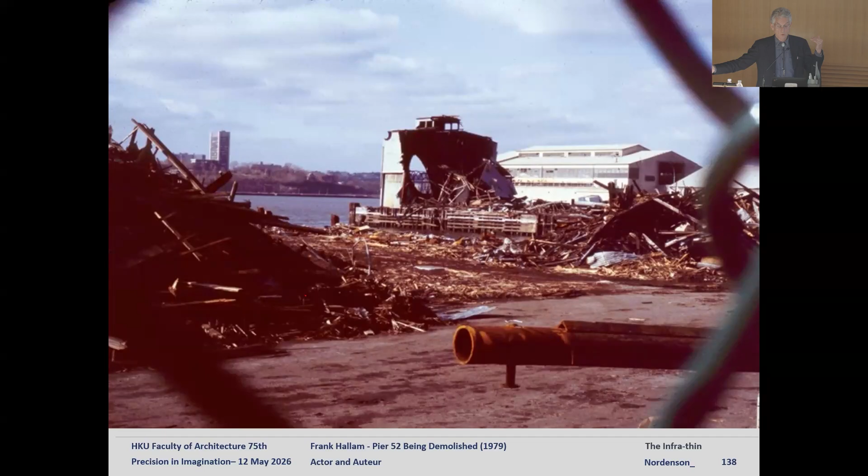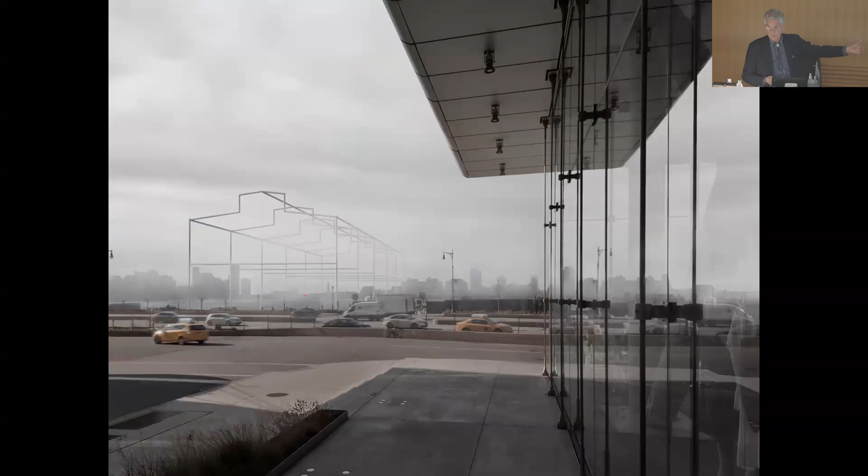Weinberg called me and asked if we could help figure out how feasible this was. So we started from the sketch, working from the principle that we were going to try to realize a pencil drawing in space, and did a series of renderings. Gina Morrow in our office did all these renderings with others that tried to express the ephemeral quality of the structure we were trying to build, as thin as possible, with slightly different geometry because of how it had to function structurally in the wind, but very much in the same spirit.

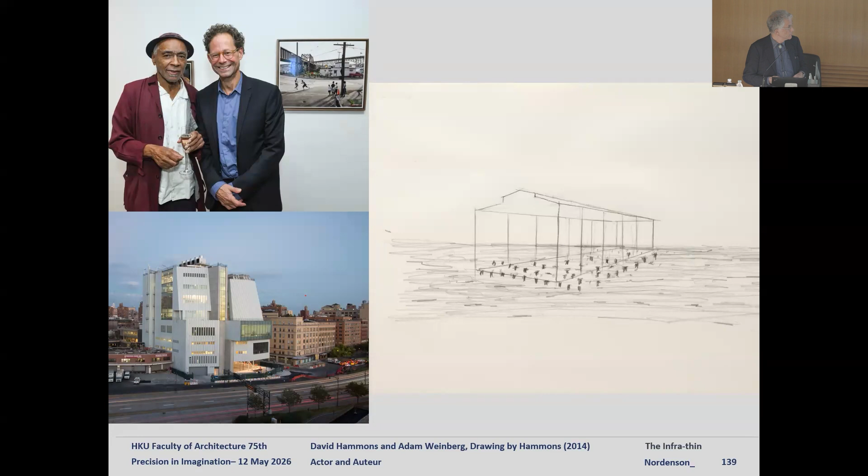We had to locate the sculpture - nobody really knew, actually, if you look back on the sketch, he didn't really know exactly where it was. So Gina was able to figure out from documents she got from the city exactly where the building had been, but also the proportions of that building which we were trying to recreate - how it was divided in 5 parts, the size and all of that, which we actually had to scale off the photographs. So we came up with this and built what you see here.

Each of the members that make this up is 20 centimeters in diameter, and it spans 20 meters. So the span to depth ratio is 1 to 100. They're very thin, and that's what we wanted to do, make them as thin as we possibly could.

That's achieved by making the ends, the walls of the pipes, thicker so they're a little bit stiffer, and making rigid connections between the verticals and the horizontals, but also bending everything in the opposite direction from how it wants to sag, so that the end result would be dead level and dead vertical.

The joints are made to disappear. They all have to be mechanical. You can't weld over the water for environmental reasons.

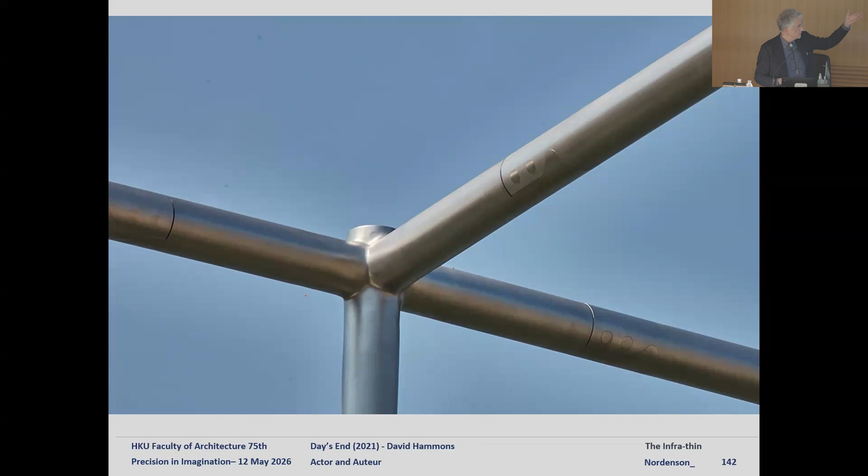So you can see there, the two dots. Those are the pins that go through and hold the two parts, the beam and the column, together. So the joints are castings. The actual joint there is cast steel, and they're being cast in Brazil.

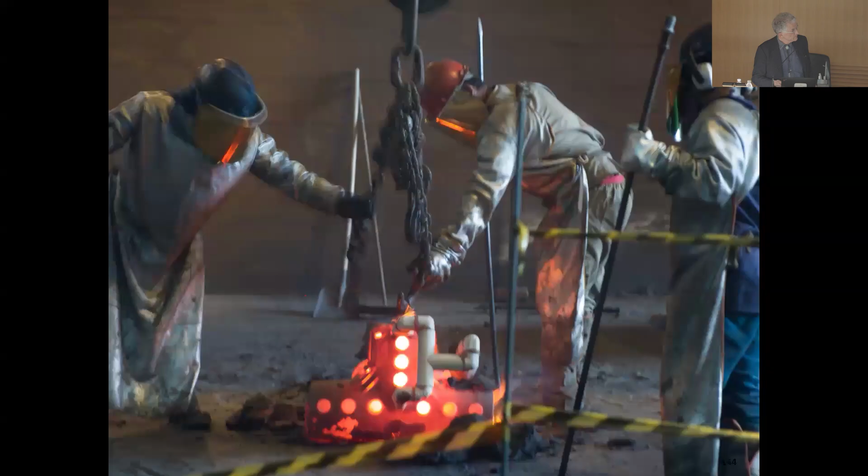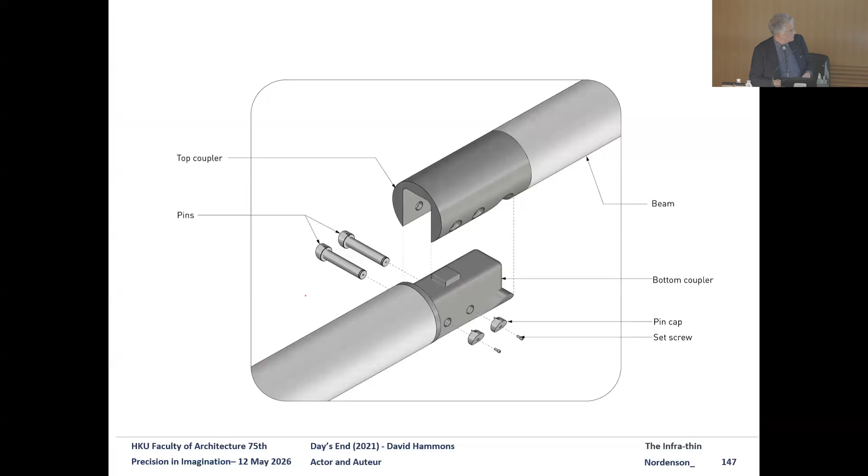Then the seat between the beam and the stubs that come off the columns are machined. That's what they look like. So they fit together like this with the pins, all in order to get a rigid connection, but also making a connection that totally disappears. And here it is being installed.

The goal here was to make something that was as abstract and ephemeral looking as possible, and to make the magic that went into it disappear. The idea that you're bending it, nobody knows any of that. But the fact that it is there, representing this drawing in space that had been mailed to the museum, is what we were trying to achieve, and I think succeeded in doing. And with that, I thank you.

Thank you very much, Guy. I think actually for me, it's after all these years, this is the first time I listened to you give a talk that really discusses some of the things you care about, architecture and engineering. I'd like to start the other way around, talking about the last project you presented, about that joint.

So to hide the joint, where only the creators involved would know, is something that's always very intriguing for me. I could think of two buildings that would share a similar story. One is probably better known, put it that way. Actually, it's Frank Lloyd Wright's Robie House in Chicago, with a huge cantilevered roof at the end.